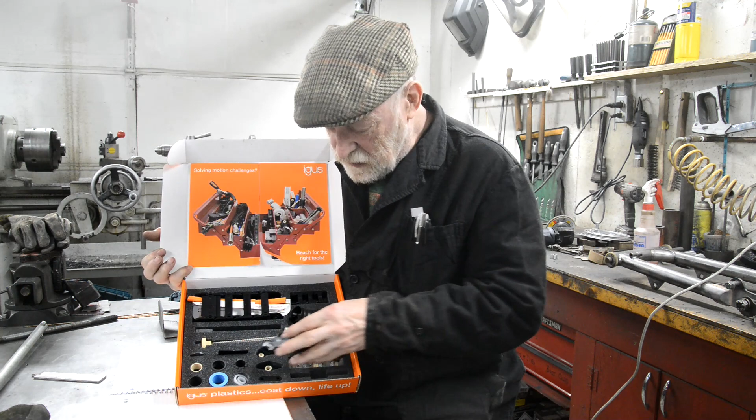I love this one. They seem to use glass of some sort as their bearings. But look at this. I mean, you can't feel it, but it's completely frictionless. And then inside the lid, there's a little thing that tells you what they all are. That's a Drylin SD lead screw. Very nice stuff. Very good from them. So there you go. As I say, a rarity nowadays.

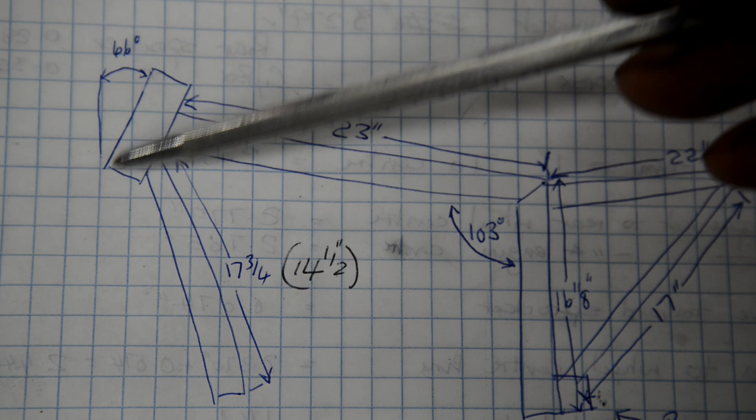Right. Let's have a quick look at the drawing so I can explain what we're going to do with the frame. Right, back to our drawing with its dimensions. Okay, we've done the swinging arm. So the next thing we're going to do is this part of the frame here. The seat pillar, the top tube and the headstock. Now I'm going to make all three of these out of 1 3/4 inch chromoly. This and this a 16th inch wall. That is 1/8 inch wall because I chose that because it suits the bearings, and there will also be, of course, a bearing cup sort of thing welded onto each end.

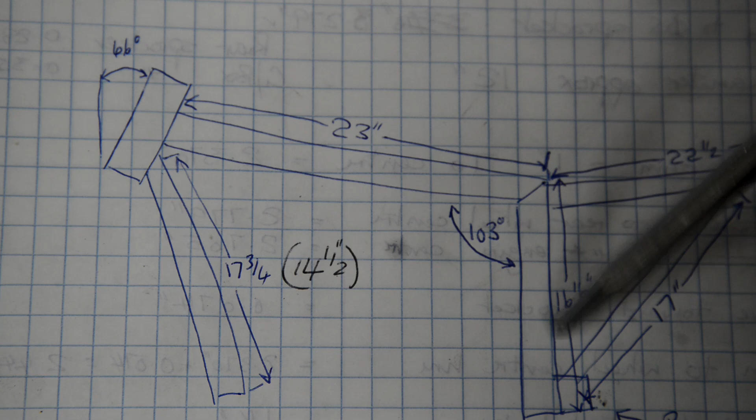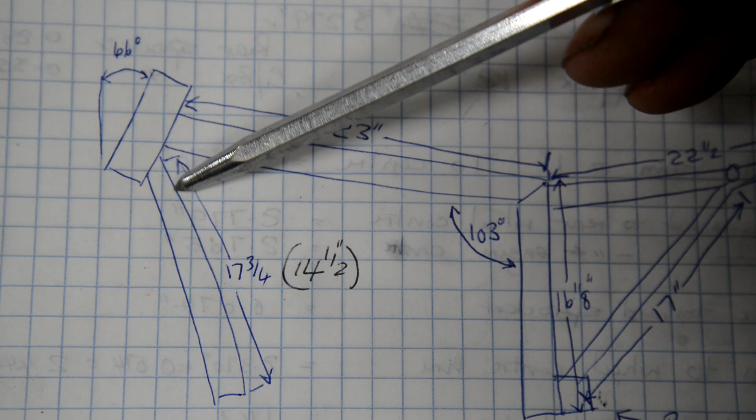Now, using 1 3/4 for all three means that we can make this part laid down on the table. So you'll see that get done, and then we can put the bracing pieces in here, and we can put, as I say, the bearing carriers on there. Then we can go to the next stage. Now, I'm not going to put this piece in at this point because of those exhausts. When I modified the B25 frame, I had to swing this back and down to go down the front of the cylinders and inside the pipes. I don't know if I'll have to do that this time, but I'm not going to weld that on and then find I can't get the pipes on. So basically that's going to be about the last piece of the frame we make, because the engine's going to be in before I even look at that.

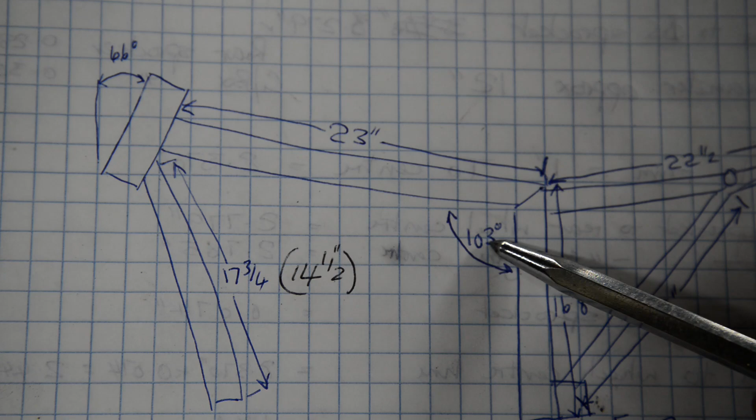So, if we don't put the gusset plates on, this and this are all the same diameter, so they'll lay down completely flat. Now, as you see, we have to do an angle here of 103 degrees. Now, I'm not going to try and hit that exactly, because the same as here, I want this to be 24 degrees, but that's when it's standing. Right, the headstock angle is a compromise to a certain extent. What we're actually saying is 24 degrees plus or minus. Because when it's standing there, we've got it 24 degrees, great.

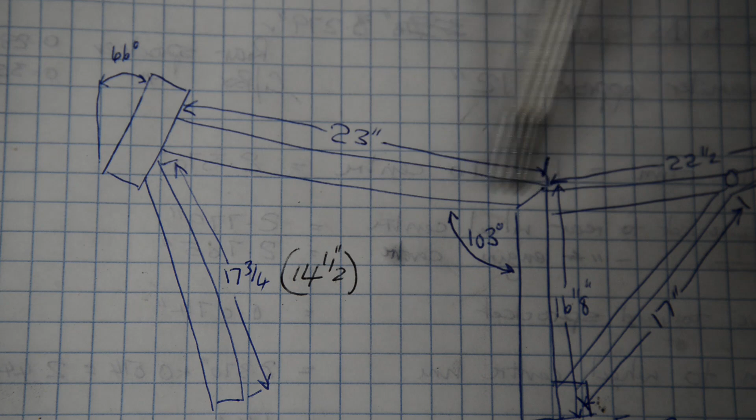As soon as a rider gets on, the front and rear suspension are not going to go down the same amount, so the headstock angle is going to change a little bit. And if he's 10 stone, 140 pound, it won't change as much as if he's 13 stone, 180 pound. And similarly, going uphill the weight is on the back, the front end's going to be slightly light, the angle will change, and going downhill, the angle will change the other way. And that's why you'll hear people say a bike is great, except perhaps when you're going down something steep, the front end tucks in if you try to steer. So what we're saying is, okay, 24 degrees. It'll work well between 22 and 26.

But if we made it 26, then actually it would be working between 24 and 28. So for the first couple of degrees of change, it would work fine. And then, as I say, maybe the end tucks in, maybe the end gets too light, who knows. So we're going to aim as close as we can for 103 here.

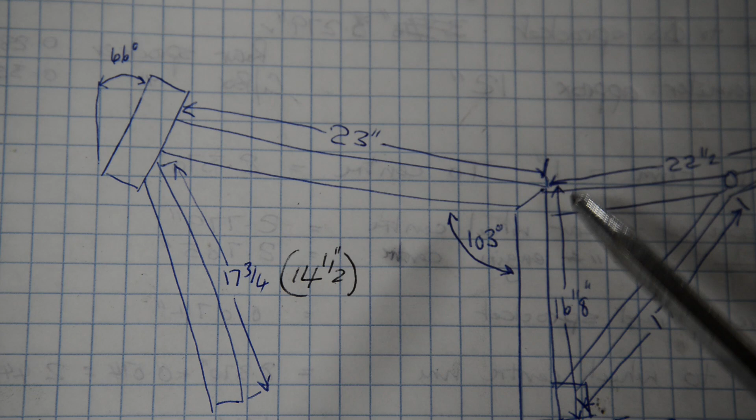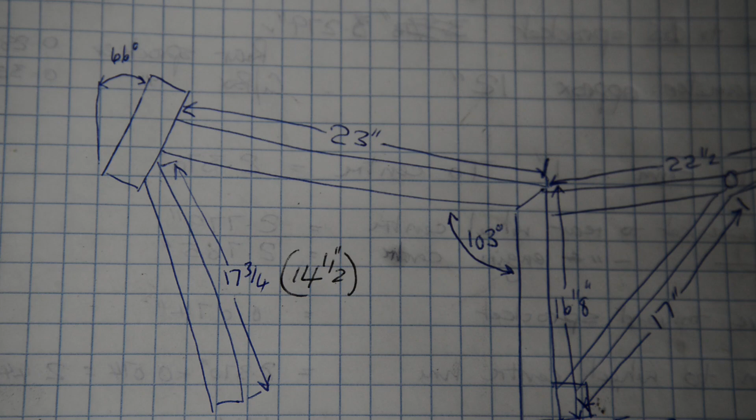And what I've done is I've made a little fixture, because I was thinking my horizontal bandsaw, for instance, is a bit of a cheeky one. I can't set it to cut that angle perfectly. So it was going to have to be done by hand. And I got thinking about it. So what I did was, let me pull you out slightly. I made this. Just a piece of scrap box section.

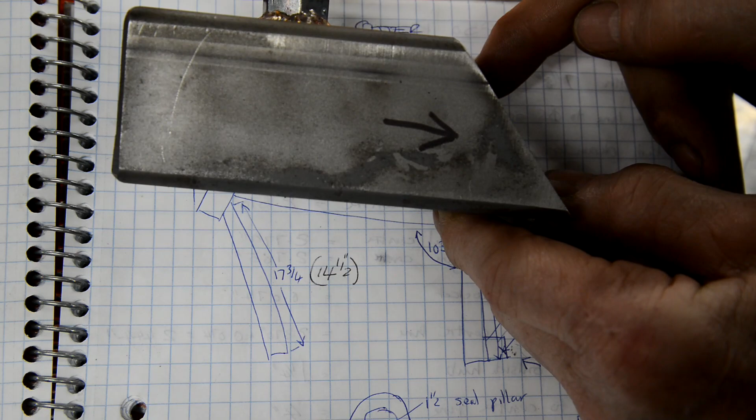Now, this angle here is, whatever's half of that, 51.5 degrees, because that's the mitre. So this is 2-inch box section, 1/8-inch wall, so the hole inside is 1 3/4. So I'll put the tube in, I'll clamp it, and then I can use this as a guide, go down and cut my 2 mitres.

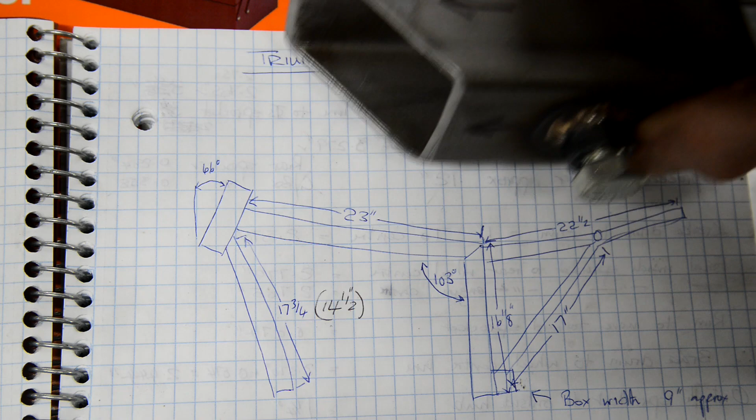So let's do that. I'll tell you what we'll do before we do anything. Look, see, that's 23 inches to the headstock from this vertical. Let's go and have a quick check that that's going to be all right. Right, now I've stood a piece of tube up. It's probably a little bit further back, maybe half an inch than it's actually going to be. That's roughly where the engine is. But that is about right for the swinging arm.

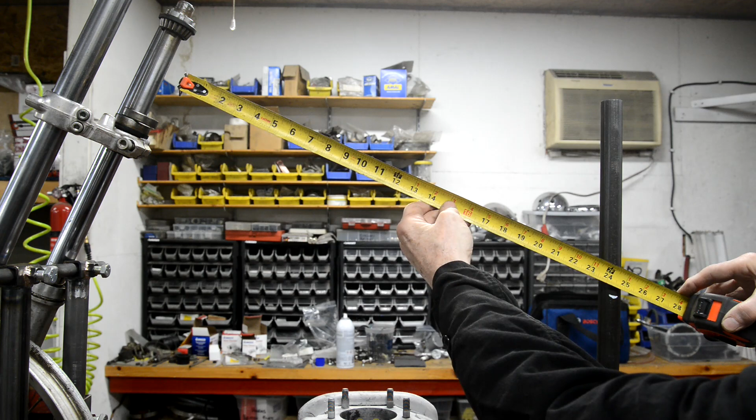So that's marked at 16.5 inches, which is round about where we want to be. So from here to here should be around 23. Let's have a little look. That's going to be big. This is bigger tube. So it's going to be up there. There's 23. As I say, that's going to be a bit near the engine. So that dimension's fine. I think we can go fine with the 23 here and the 16.5 there.

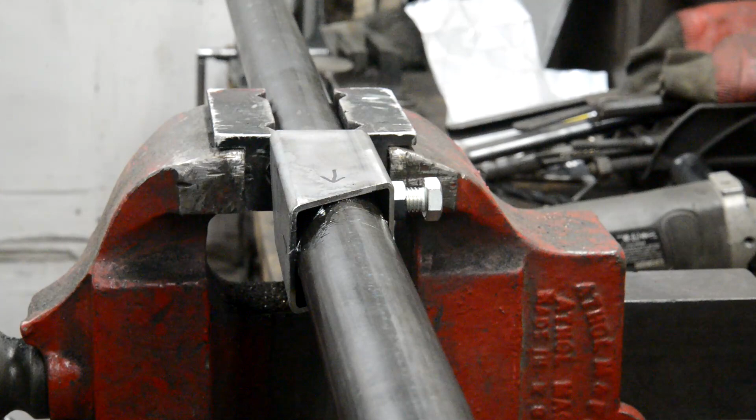This one I'll cut a bit long, but this one will cut to 23 when we put the headstock on. Now I've measured this at 23.5 to give me a little bit of leeway at the other end.

You know, this vice is playing up now. It won't tighten up on the swivel part. I've got to find myself one without a swivel.

Alright, let me clean this up and then we'll check the angle. Alright, there it is. I've got these two with some blocks just holding them in place, and actually this thing is magnetic. So there it is, clamped on there nicely, 103 degrees. I think Charlie's drawing on his website says 103.5, so half a degree. That little fixture worked a treat. That really made it easy.

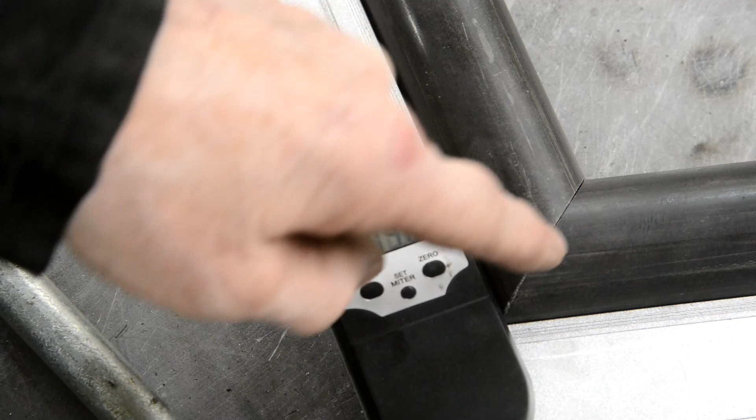So what I'm going to do now is, this piece here is the 23.5 inch one, so I'm going to cut this piece to about 18 inches to give me plenty of space, and then I'll clean it up and weld it. I'm going to TIG weld this because round here it would be fine to bronze it, because I have somewhere for the bronze to actually stick to, but once I get round here there's virtually nothing. And don't forget, we are going to have a nice gusset plate on either side. So as I say, let me cut this piece, clean it up, and then I'll weld it.

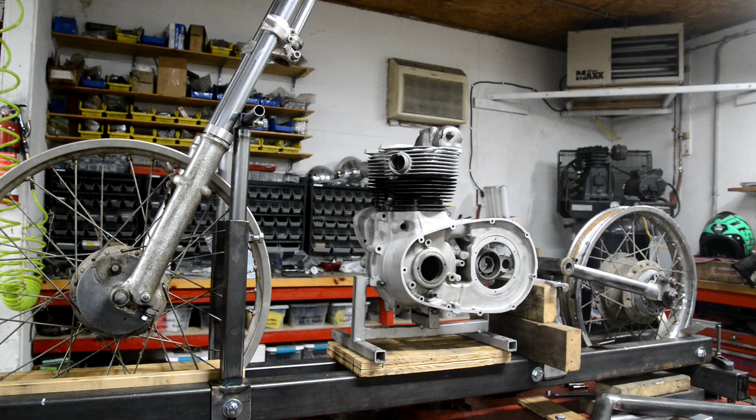Now then, as you can see, I've put the barrels and the head and a rocker box on here so I can see how big that is, and I put the swinging arm in, set everything up. I'm glad I did, because I found two things. Well, one I've had to modify, one I'm glad I noticed. So let me bring you in closer and I'll tell you what I found.

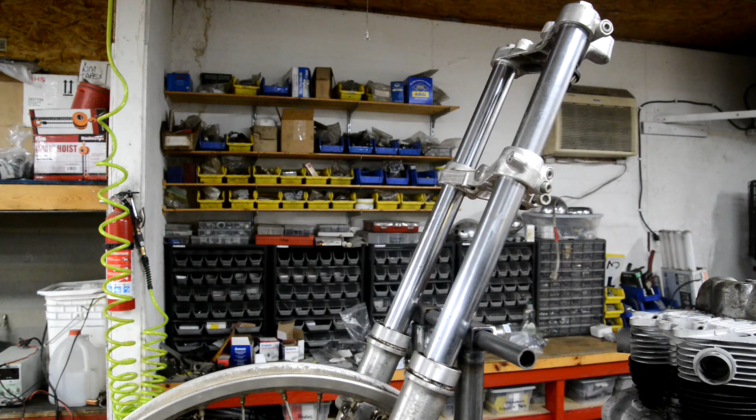When I first looked at these yokes in the stem, I thought it was a pair of sort of ordinary type forks with the actual stanchion and the stem parallel, but they're not. They are offset yokes. So what I find is,

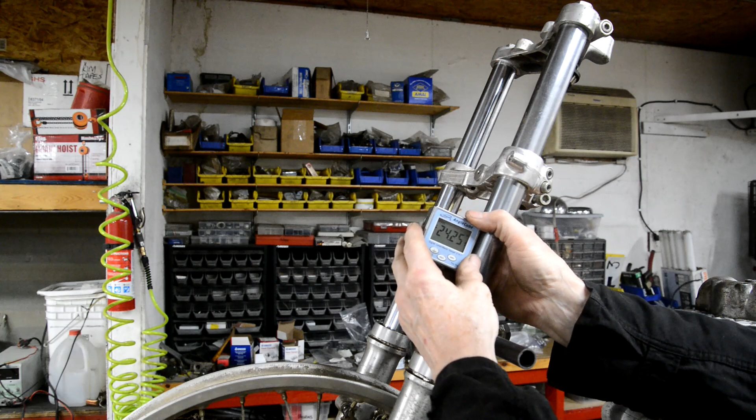This is basically 24 degrees, which is what I want to set them at. But when I go up here, I don't think you'll be able to see this, but it's reading 22.55. So the reason I needed to know that was, when we get round to working these out, I've got to work out the angle that this tube is going to be at. And I was going to set it at 24, but it's not. It's only, as you see, 22.55. So that's one thing.

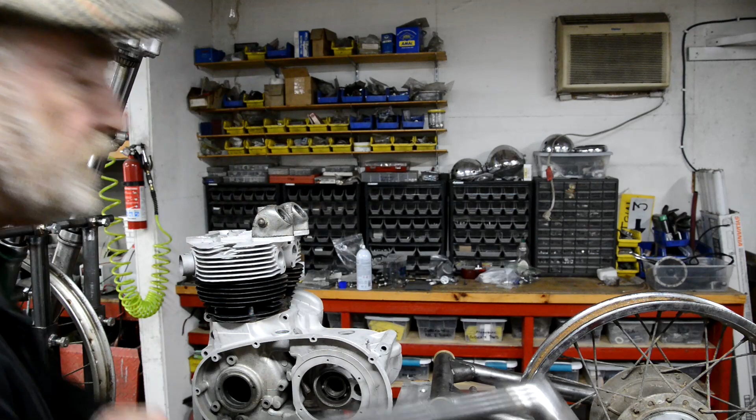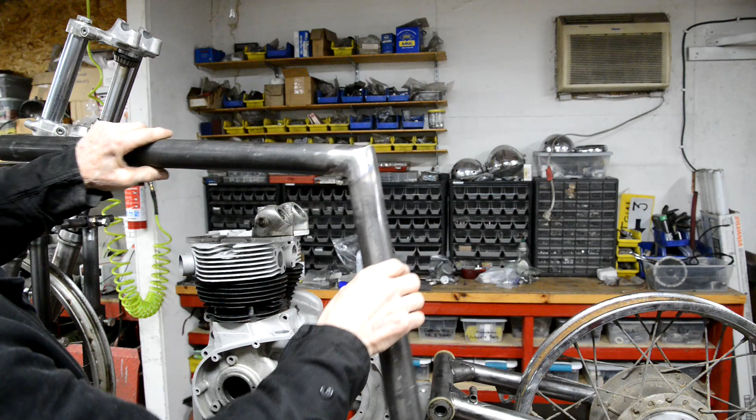The other thing was a bit more work involved. It might be difficult for me to show you this without getting in the way, but when I first welded this up at my 103 degrees and I put it on there with this vertical, the tube was right down here. So I fiddled around, and at first I thought I'd got a little bit of numerical dyslexia, because what I actually did was cut through the weld, just left it welded there so that I could move this around, and I found it was around 113, and I thought, God, did I read 103 and it should have been 113? So I left it for the day, and I went and checked that it was 103, which it was.

But what I have done is lifted it up about an inch or so, maybe fractionally more, with a couple of pieces of spare wood. It's an inch and a quarter higher than I had it. But I still found that I was down here and I want to be up there. So I cut through this so that I could adjust it, and I found that round about 106 degrees was right. I could have kept it at 103, but the frame top tube would have been right up here. So I wanted a bit more of an angle. I didn't want too high a seat height.

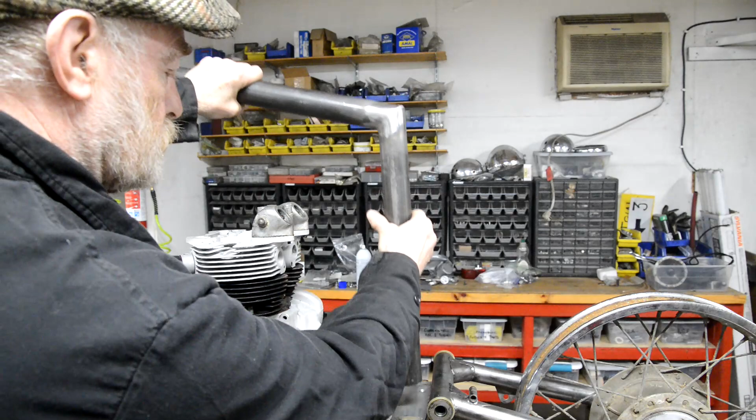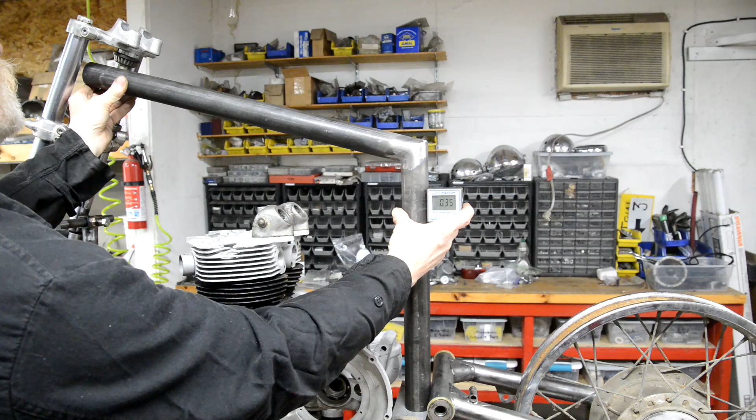So I've put some wood in here, just to get me roughly where that's going to sit. I can actually hold that like that now. I don't know if I'll get in the way here, but if we put that on there, we'll get it to 0, which is just where I want it to be, just underneath where the bearing cup will be. There. Can you see up here? It's just underneath the bearing. So that's spot on. Now the other thing I want to check, hang on a second while I get my tape measure.

Here's what we're going to do for seat height, because I'd like the seat rails to come to the top here. So that goes to about there, that goes like that, and we have got, wow, 33 inches. These forks are 30 inches long, which is exactly the same length as the BSA ones. Oh God, I don't want to have to cut that and re-weld it again. Why is that so high? 33 inches. I want it down around 30.

You can see there's an enormous gap here. It should be more like that, but you can see how far out it is then. I think I'm going to have to redo this angle. That should be 16 inches to there. Now this I made a couple of inches long. Let me get some more blocks of wood and do some more looking at it. That puts the seat at 30 inches, but you can see what the angle wants to be, and there's still loads of room above the engine.

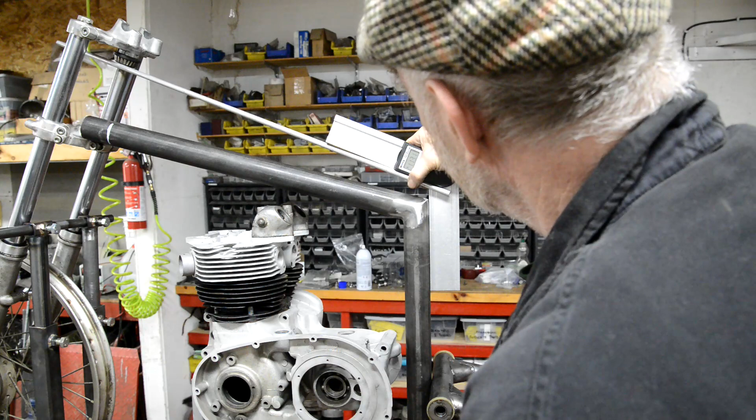I've already welded that thing up twice. I guess the only thing to do is cut through it again, open it out. It's going to end up at 113 degrees. Bet you any money. Hold on a second. This is 113 degrees. See? I was going to make it that, and then I moved the engine and fiddled around and thought, no, 106 will do.

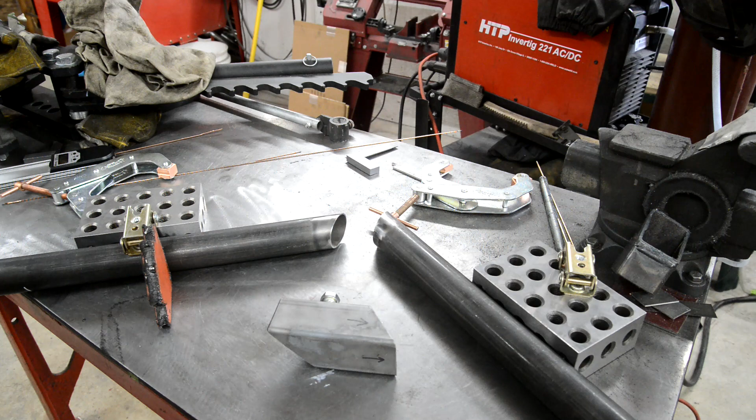Oh, lunch and more thinking. Right now, whilst I was drinking my cup of Yorkshire tea and eating my toasted cheese and Branston pickle sandwich, I thought a bit, and what I've decided to do is we're going to make a sort of amalgam of the two things. We're going to make an Otter designed bike, but I'm going to change a couple of the dimensions to have it more the way I want it to be, because I looked at a load of photographs, and yes, the BSAs as well as the Triumphs, the engine's high up. There's a couple of things that I don't think suit modern trials.

So what I've done is I remade this to be 113 degrees. Well, this is actually 56.5, and I've recut these, and it just struck me, I don't think I showed you exactly how I set this up. Hang on. It's 70 degrees, I've got the doors open. So all I've done is I've got this up against a good solid block with one of those nice little foldy up magnet things and everything holding that there. Then what I've done is put this onto there to make sure if that face is completely vertical, then I'm right.

Then we're going to put that there. Do exactly the same here with blocks. Then I'm going to tack it. This time I'm going to try it out, and then if everything's fine, we'll weld it up. And I did notice when I welded the last one, even though I tacked it, the angle did change a little bit. When I did the first one, it changed half a degree. It went from the 103 to 102.5, and the same the second time, when I set it to 106, it came out at 105.5. So I'm thinking that I must have started here, and as that contracted, it pulled it in a little bit. So we'll tack it, and then we'll weld at this point here, and then we'll weld under here. I don't know whether it's going to work having the door open. Anyway, let me get this tacked, and then we'll see what it looks like on the bike.

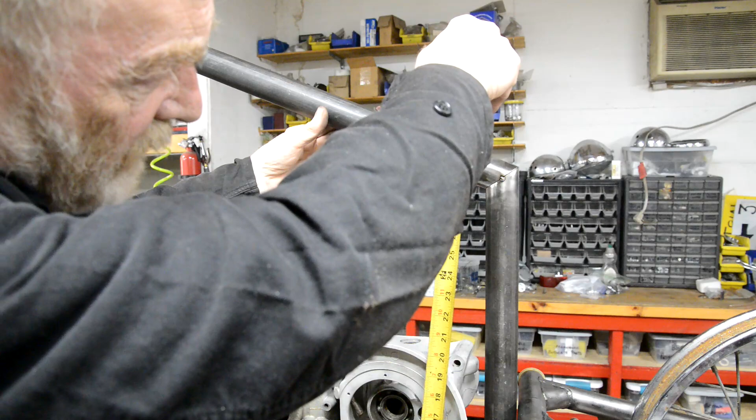Right, and I have a little bit to play with at the bottom. So that's going to be about there, and that's going to give us the top of the tube at 30 inches. We can have the seat slightly lower, and I just checked, when the seat rails are on there, that's just the right height for the 14-inch set of units that I'm going to get. So that's good. Right, let me weld this.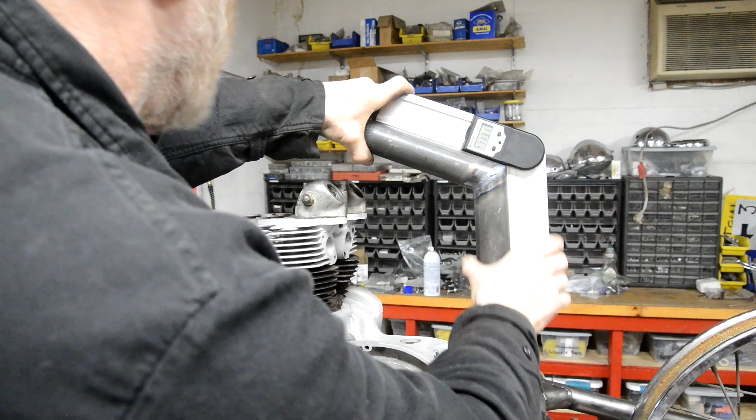Right then, took a little more care when I was welding to make sure I didn't get anything. 113.0. Right. Now, as I say, this end, the bottom, which you can't see, is a little lower. It's going to be slightly shorter than the dimensions on Charlie's website.

Come on, go the right way. What are you doing? Zero. And we're just below the bearing. Now I can actually raise this up slightly. Oh, it doesn't need to go up, 1/4 of an inch, that's all. We'll see that when we get that off. And now make sure I'm still right with this.

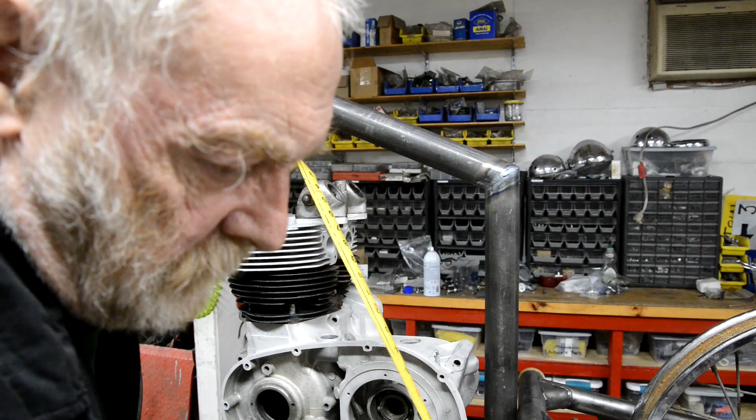29.5 or thereabouts. So that's great. That's exactly right. Now then, we're good for this 23 inches for the length. That actually comes forward a little bit to give us room there. Actually, I think I'll make it a little bit longer, because as we've put that angle there, all that geometry stuff, the distance from there to there is greater when the angle's greater. So we'll make it just about 1/2 an inch, something like that.

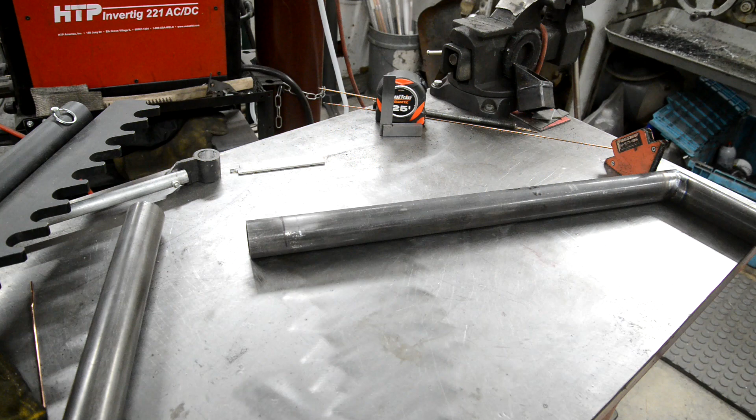So now what we're going to do is we're going to mitre this a bit, not mitre it, sorry, whatever the word is. Get our bird's mouth thing for the headstock. So let's go over to the welding table and I'll show you something about that. So we've got our seat pillar and our top tube set. So the next thing to do is to put on the headstock.

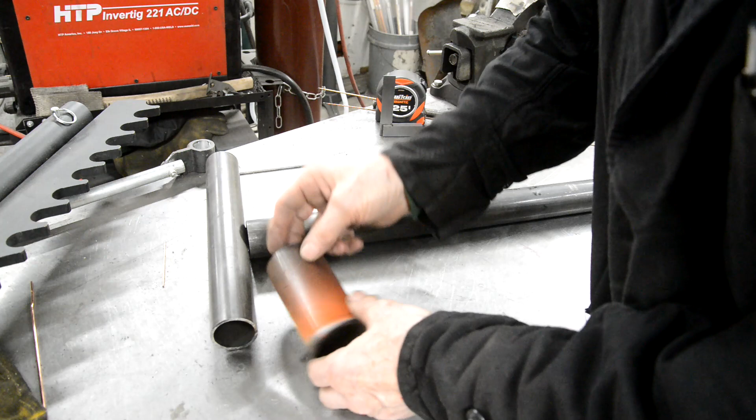Now, as I mentioned, I've used 3/4 for all of these, because that way we can just build it laid out on the bench here. This is 16th wall, this is 8th wall, because we're going to make the bearing carriers, and the bearing carriers will be made out of this, because this is 1 3/4 ID, so it just goes on there, and then it's a nice thickness that the bearing is just slightly more than 1 3/4. So it'll turn that out a little bit and everything will be fine for the outer race.

Now, we need to set this at the right angle. We want this to be 24 degrees. Well, no we don't. We want this to be 22.5. If this is 22.5 because the stem is in there, then the forks will be at 24 degrees. So we need to know this angle here. So here's how we're going to do that. A little bit more geometry. I've done more geometry the last couple of weeks than I have since I was at school.

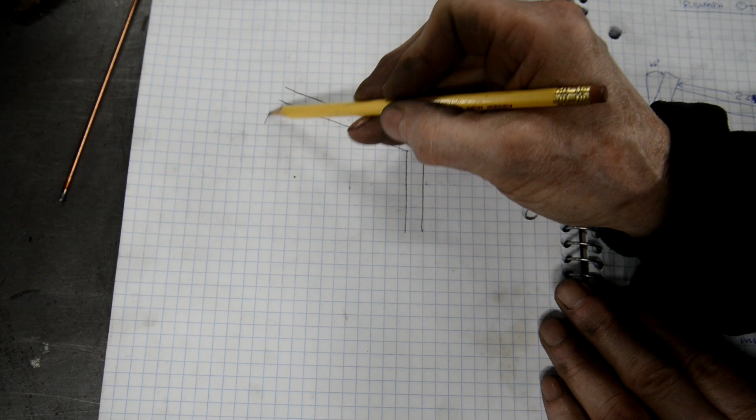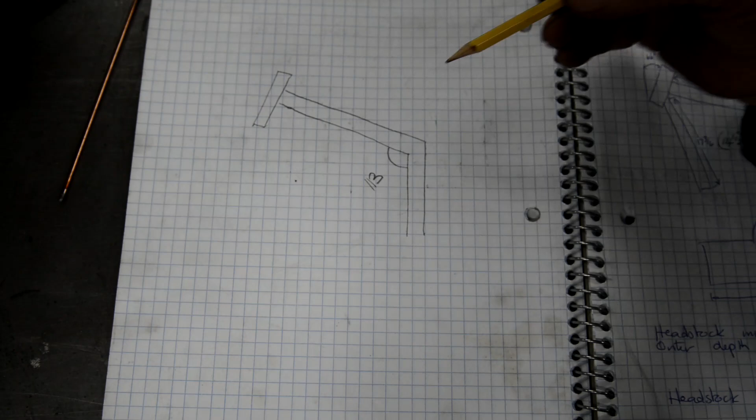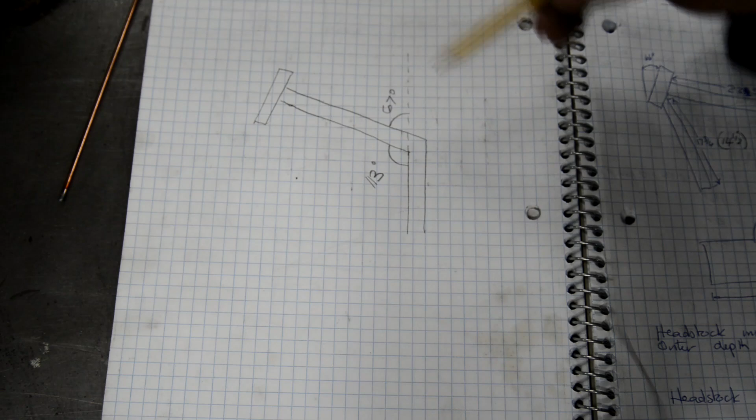Alright, we have got our seat pillar and we have got our top tube, and now we want to put on the headstock, right? So we know that this angle here is 113 degrees. So this angle here, because that is 180, must be 67 degrees. Right? Now a parallel line through there would mean that this angle is going to be 67. Right?

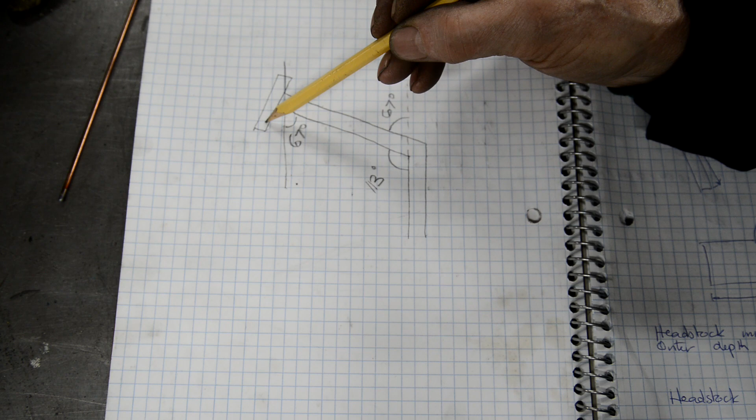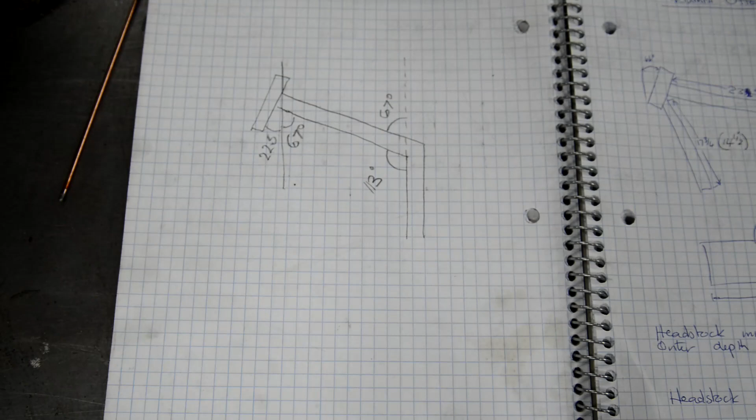To get it as vertical, and we know we want to be 24 degrees or 22.5 degrees out of the vertical. So that's going to be 22.5. That's going to be 22.5 plus 67.5, which is 90 degrees. So it's almost right angled. You may remember that when I do the B25s, that's almost a right angle. On there, it's a very slight angle.

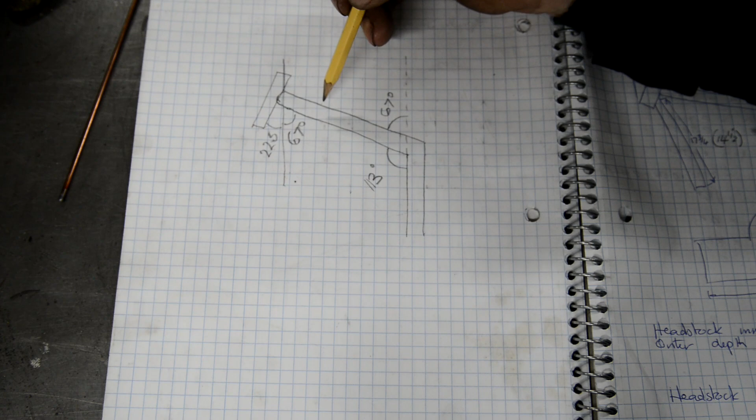So what we'll do, because we've got to do this by hand, is I'm just going to do that 90 degrees. When I cut this piece here, I'm going to do it as if it's 90 degrees, and then we can just ease it with a file to make it the other bit if we need to. We'll put it on, see how it goes, and what have you. Now this, the cope, that's the word I was looking for before. This cope here, or as it's called, the bird mouth, because of the way it looks, that's going to be like that slightly, see, to fit around the tube.

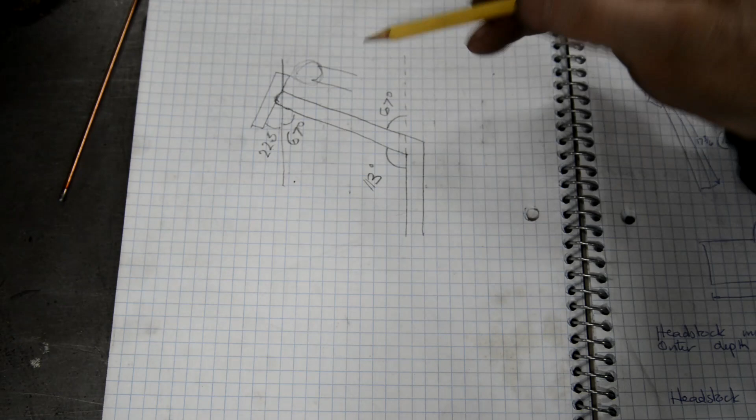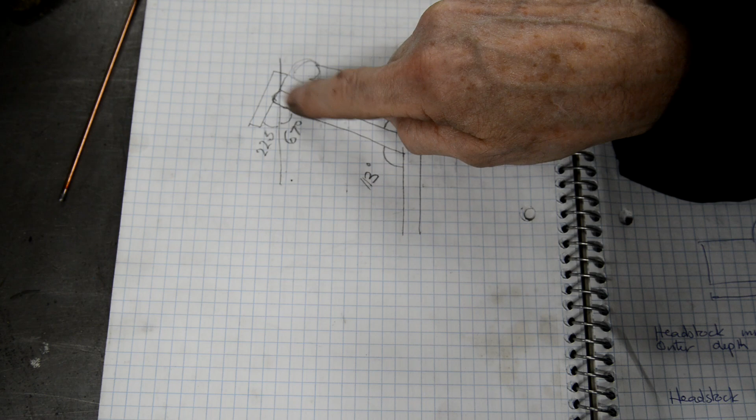I actually bought a tube notcher. I bought it from the same place that I got the tube bender, really nice big heavy duty one, and wouldn't you know it, they're having delivery problems, it hasn't arrived yet, so we're going to have to do that by hand. But fortunately, as it's only 90 degrees, what I might do is just stick it in the mill, do it at 90 degrees with the 1 3/4 inch hole saw, and then just fine tune it after that. Okay, so let us now find out how long we need this to be.

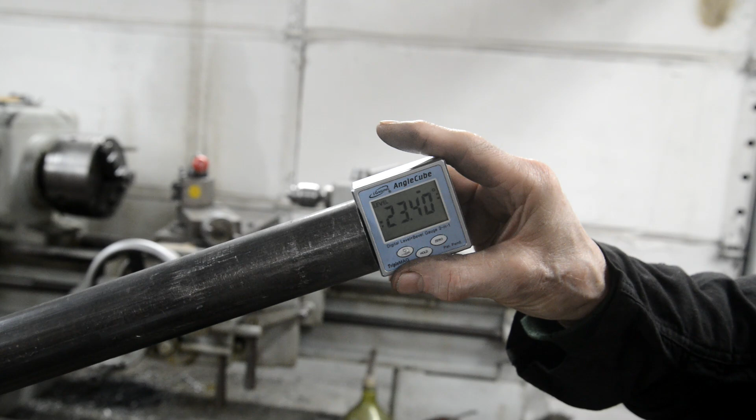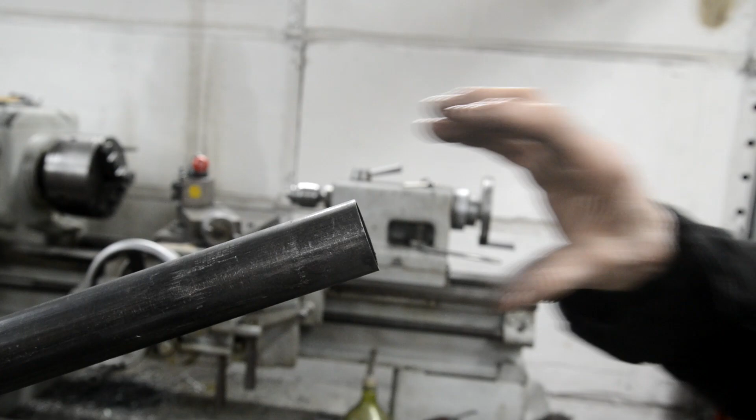Just thought I'd do a quick little experiment here. I've set the sort of seat pillar tube at vertical. Oh, see, we're less than a degree out. We want it to be 22.5, it's 23.4, and that wants to go that way slightly. Okay, so I'll do this at 90 degrees, just a little bit proud of the mark, and then we can just file it very slightly and we should be able to get our 22.5 easily enough.

Right, we've got our bearings here on the stock, so that one's going to go in there. So the tube, the headstock tube, needs to be from there to there, and then the bearing carriers go on the outside. So that is 5 1/16.

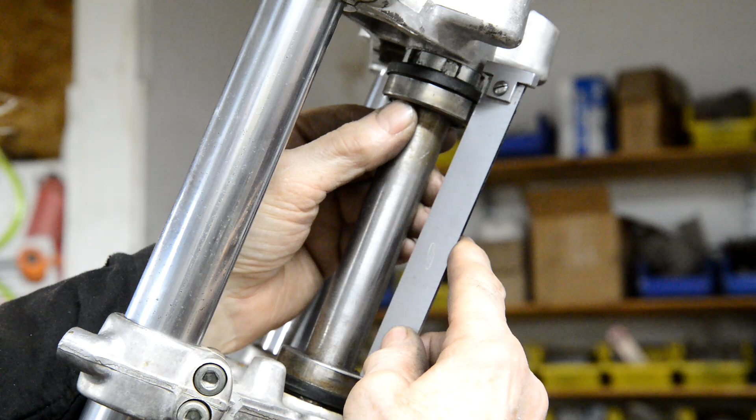Still can't get in close, but that's what it is, 5 1/16. Okay, now we'll make it that size, and if we're slightly out, we can always put a little washer underneath or something like that. So 5 1/16.

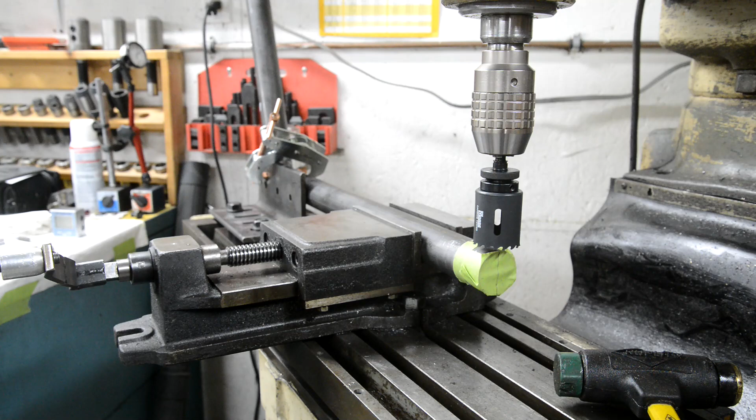So I've got this set up in the mill. It's in the vise here, that's perfectly level. That's up against an angle plate, all clamped up, so that's vertical. Not only did I check that was vertical there, but let me zoom you in. See that line there? When this was laid flat, this is 1 3/4. I measured up 7/8, drew that line, and then that was my nice rough guide.

I just put that on there, put a square on it. Will the square go up there? Yep. Made sure it was about that, and then used the level on the other end. So it's level all round. The back piece is vertical, this piece is level. We're all set up, marked to place for our hole saw.

Now, if any of you are wondering why I didn't just set that and then angle the head with a hole saw, it's a very good reason. This head isn't a swivel head, so I can't change it. Alright, if my nice tube notcher was here, it would have been easy. So we'll do this at 90 degrees and then we'll see how we've got to work on it.

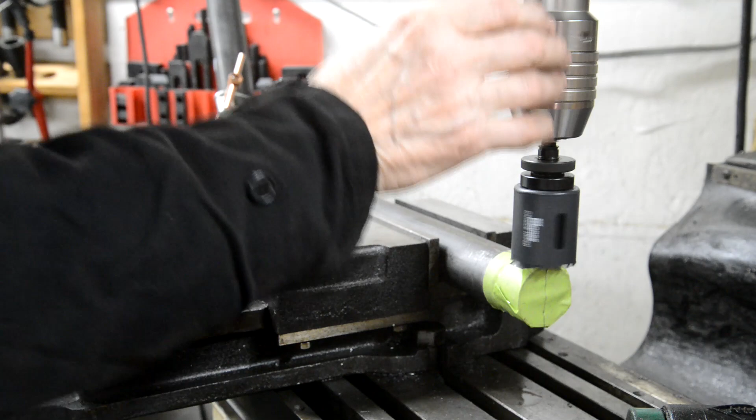Okay, safety glasses, there they are. Oil, there it is. And we'll probably have to slow this down a bit. Okay. What happened there? I've got everything tightened up. The little things are in there, they're in. That's tight. Still on our mark on the DRO.

This is a brand new saw, would you believe? Why is that waggling? Down even more. Working around the camera, that's the problem here. But it is at least cutting now.

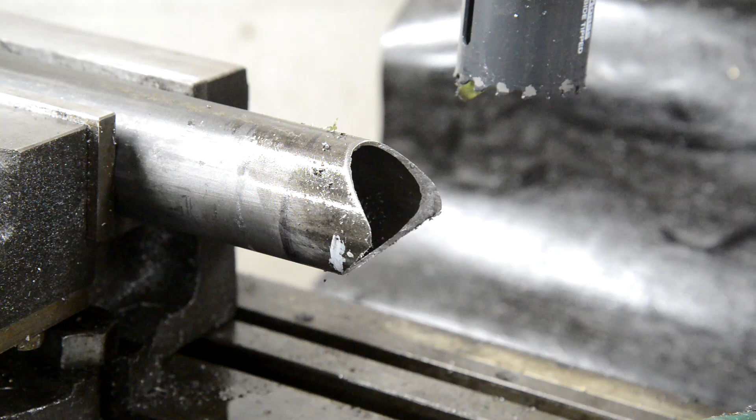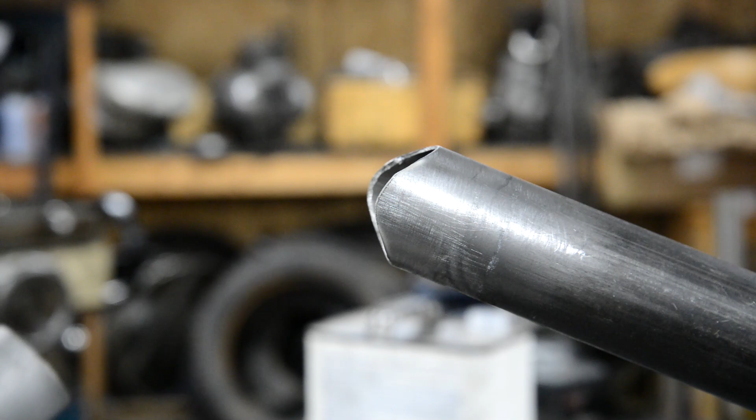Right, well, not impressed with that hole saw. Get the fan, clean it up and see what it looks like. However, I can't complain about the fit. That's perfect. No wobble, nothing. Alright. Right then, I've set this up in the vise with the seat pillar vertical. I say that made quite a nice joint, didn't it? So let's see how we came out with this.

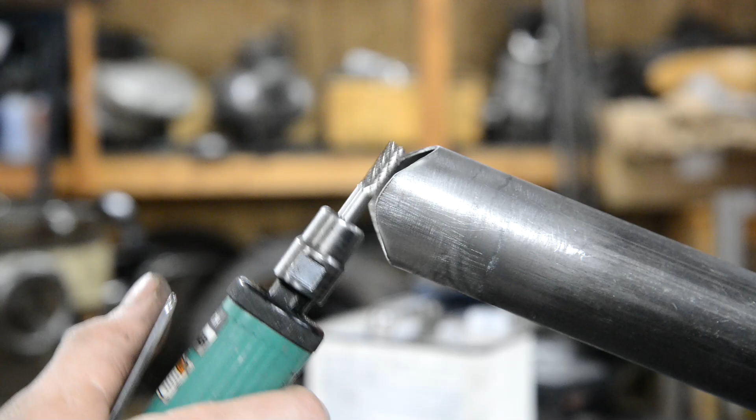23.1, God, we're looking for what? 22.55. So we've got to make it go in a little bit at the bottom. So what we're going to do that with is this. So I'm going to turn you off because it'll be incredibly noisy. In fact, I've got to get my little earplugs. Right, and let's see what we've got.

22.5. I'm going to leave it at that because, you know, with these you can play around for ages. Hang on, settle down. There, 22.5. Okay, next stage.

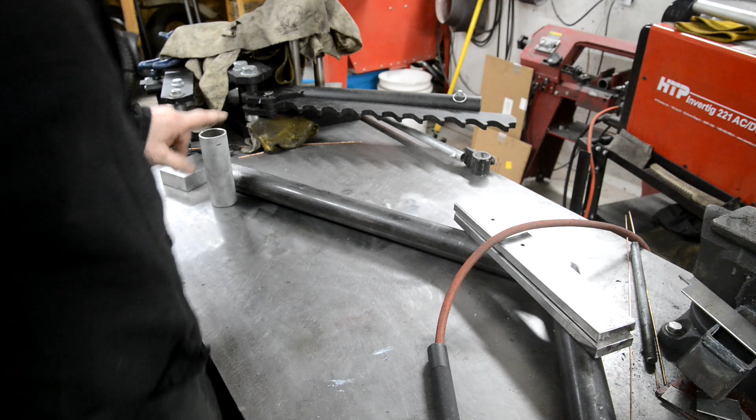Right, well, there's our headstock tube. I've marked it at a 1/2 inch because that's where the sleeve for the upper bearing is going to be. So we'll put that there. I've got this laid out flat. Like that. Okay, and we'll just give it a quick tap and then check that everything is square, and then we'll go and try it on the bike.

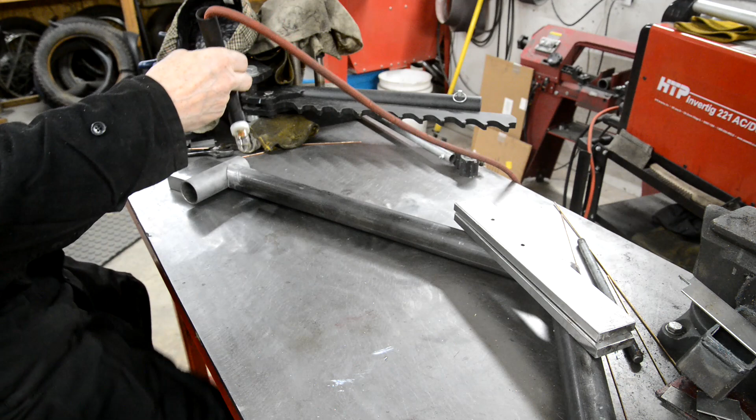Alright, there it is. I've just sat it on the bearing. It's about right there, and this is actually reading 0. You know, we've got a little bit of play in this. So that's good. Right, let me go and bronze this. It's actually late-ish on Saturday because I was busy this week. So I'll certainly get that bronzed, and I might make the plates here. We'll see how things go.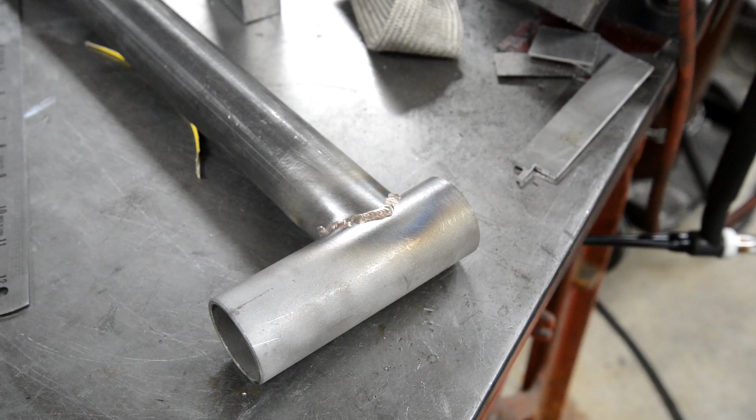Well, there's that bronzed on there, and while that was cooling I made up a template to go on this back piece. Let me show you that. So this is going to go on there like that, get bronzed on. I might curve it a little bit. So I'll cut 2 pieces out in metal, both the same, and we'll get those bronzed on, and that's definitely all I'll get done this week.

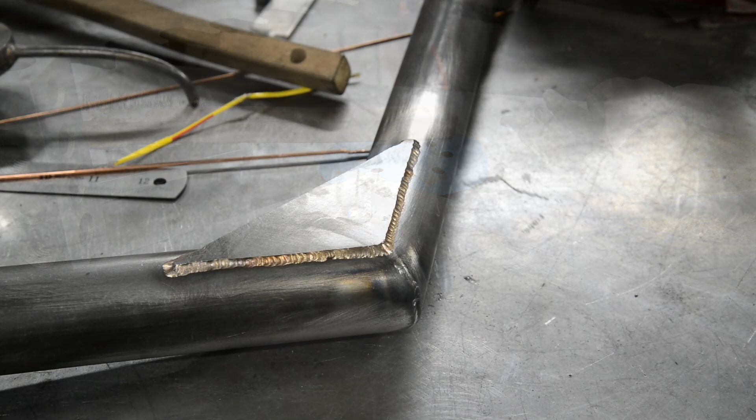Alright, well, I put them on, there's one on each side, bronzed on. A little bit hot in a couple of places. I nibbled, there look. You see the difference in the colour of the bronze? And I nibbled the edge. But they're fine, so that's that done.

Right then, next week we'll make the 2, can you see that? Sort of. Whoops. We'll make the 2 pieces that go on there, that the outer race of the taper roller bearing will go in. One for the top, one for the bottom. They'll get put on and bronzed on. As I said, this bottom tube we'll leave until last. So once we've got them on, we will put this onto the jig, and then we're going to do the box for the swinging arm mount.